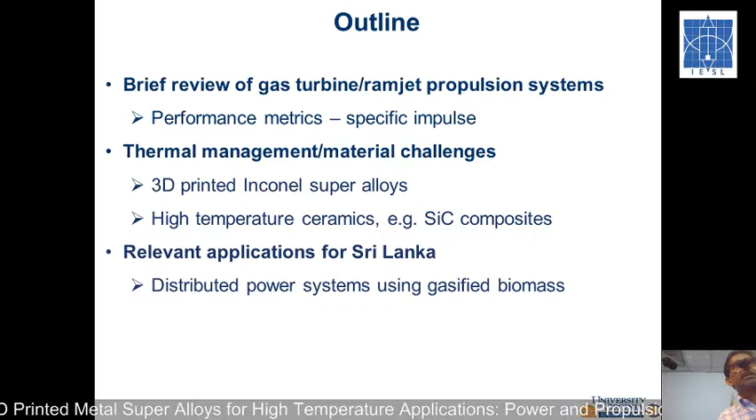I want to break down my presentation into 3 major themes. My research is on gas turbine or jet engine research, as well as another class of engines called Ramjet and Scramjet engines for aero vehicles that can travel at Mach 5 and above. The first third of the presentation, I'll talk about my own research a little bit to get you oriented. In this research, we are using this new manufacturing process called 3D printing.

You may have heard of this - plastic 3D printing is standard now, and now there's metal 3D printing. This is a very high temperature alloy, a nickel chromium alloy, which can withstand very high temperatures and stresses. Many gas turbine engine components are made out of this material, and these can now be printed with 3D machines. I want to introduce you to some of the challenges and how you could use this technology in modern research as well as for application in Sri Lanka.

So the last part is essentially about 12 years back when I was interested in using... Tranak, I didn't see you.

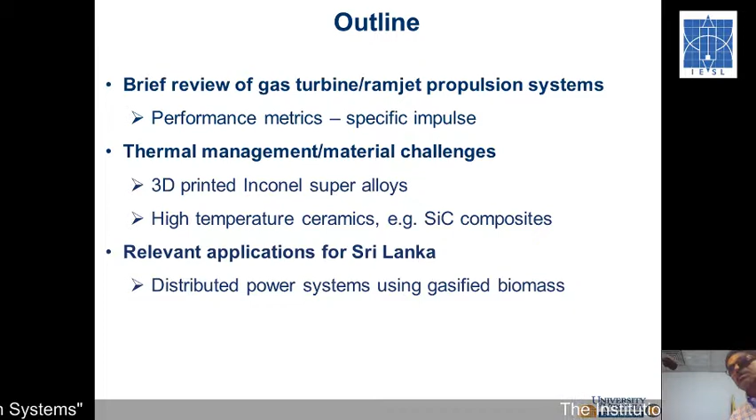About 12 years back I was interested in using gasified biomass for power generation and heating purposes in tea factories as well as the garment industry. But at that time we had a technical problem with one of the gas turbines I was going to use, and my hope is that with 3D printing we can solve those issues. So I'm hoping that with this manufacturing we can apply this and pursue this combined heat and power concept for application in Sri Lanka.

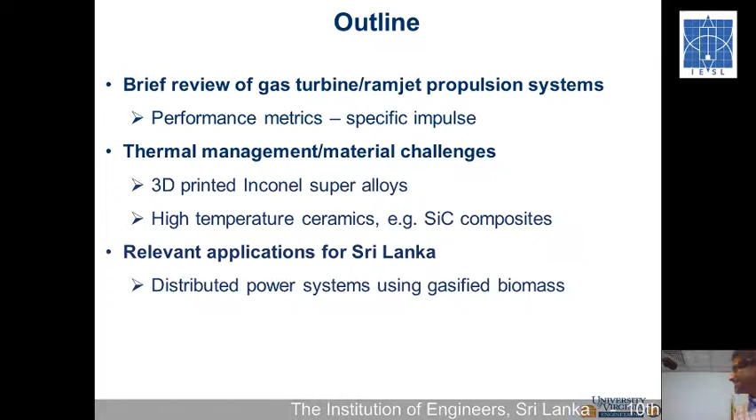So that's the 3 themes I want to share with you today, and if you get it, it's great. That's the take-home message I hope you take. Okay, so my talk.

Propulsion is my research area. Metal superalloys are of interest to many applications, and I'm interested in power applications for Sri Lanka. It's essentially CO2 neutral, using biomass to generate heat and power.

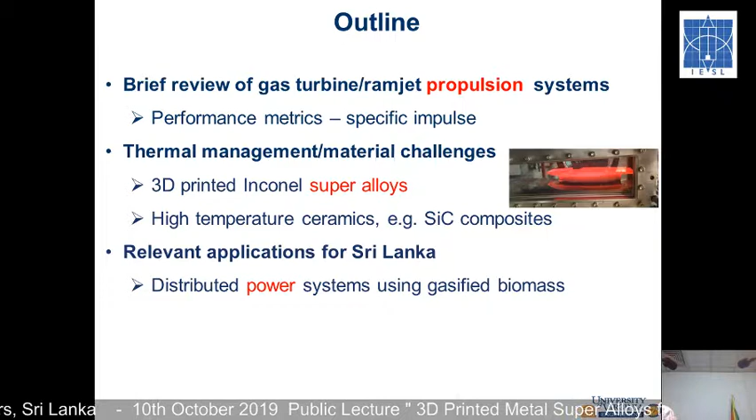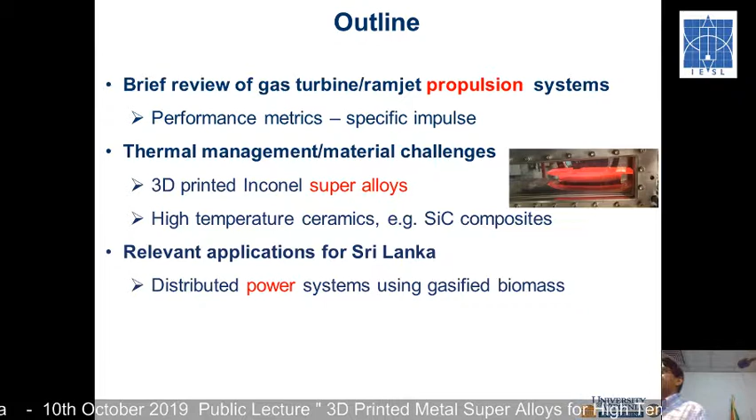So at the back of this, essentially we have cooling water going into the system. There are 5 cooling channels inside this, and that's the only way this can survive at high temperatures. This cannot be manufactured with traditional machining technique - only through 3D printing can you achieve this intricate internal detail.

So let me give a brief background on the difference between gas turbine and Ramjet, Scramjet engines. In Sri Lanka we generally refer to jet engines, which are the same as gas turbine engines, as opposed to propeller-driven engines.

Typical big aircraft fly at Mach 0.85 conditions at flight altitude of about 40,000 feet. That corresponds to about 560 miles per hour, or 900 kilometers per hour. So typical engines fly at that velocity, and this is an illustration of a gas turbine engine.

In the gas turbine engine you have 3 major components. You have a compressor, which pressurizes your intake gas - Rolls-Royce engines operate at about 50 atmospheric pressure, achieved through a series of stator and rotor blades. Then you bring the fuel in and burn it in the combustor, followed by a series of turbine blades.

These first 3 sets of turbine blades get exposed to very high temperature. Only this material, Inconel, invented in the 1940s by an engineer called Frank Whittle - the inventor of the gas turbine engine in the UK. There was an equivalent person in Germany. Inconel was designed to operate the gas turbine engine at high temperature. There are different classes of Inconel material - this is Inconel 718, which has a slightly different composition of nickel, chromium, and iron.

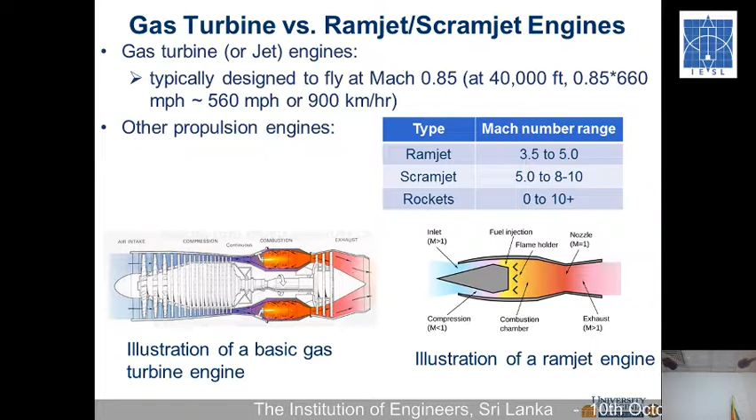Rockets technically can take off from 0 to whatever velocity, but the main difference is that rocket engines, at least current versions, you have to carry your fuel and the oxidizer. So you pay a penalty by needing to carry the oxidizer with you. Whereas these engines are what you call air breathing - you have to carry only the fuel. So your weight of oxidizer is reduced by going to these Ram and Scramjet engines.

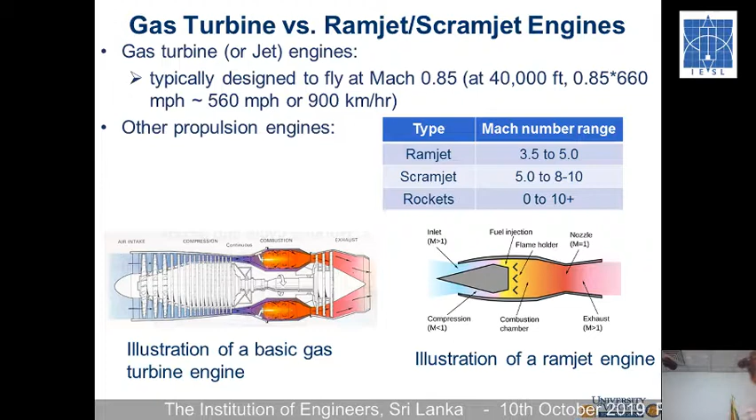So my next chart shows how to compare these two different systems. If you want to look at the performance of the two different systems, this is a way to compare two complete different systems. I'm sure you've taken dynamics - what is impulse? Force times time, and specific impulse is essentially thrust divided by the mass flow rate. The units of specific impulse are seconds.

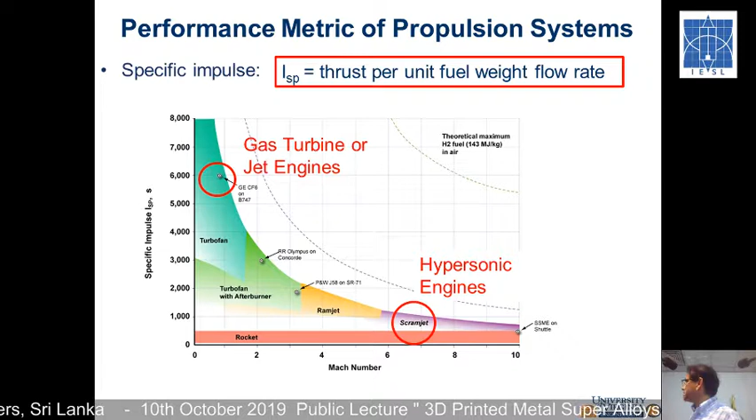If you take a gas turbine engine, it typically has a specific impulse about 6,000. These are GE - I think CF6 engine - the large engines. Rolls-Royce Trent 900 or 1,000, all below Mach 1. So they have a specific impulse roughly about 6,000, very high specific impulse.

And as you go to higher and higher velocity, your specific impulse goes down. So this is for the Concorde - it flew at about Mach 2, two times the speed of sound, and has a specific impulse about 3,000, which implies its efficiency is not very high. That's why eventually they shut it down, because it is expensive to operate.

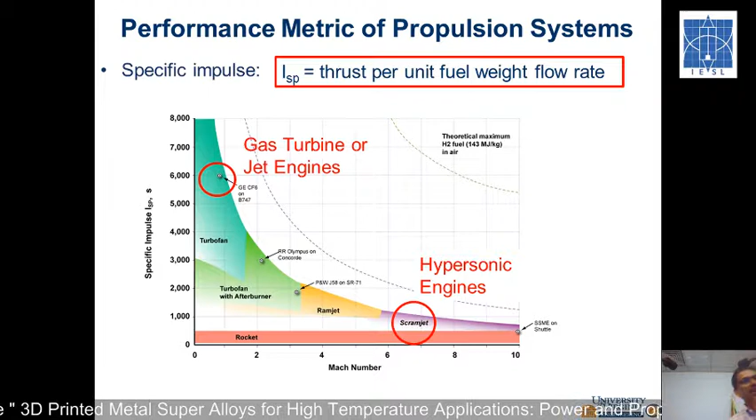Now if you want to go to higher and higher velocity, like Ramjet, which is like Mach 3.5 to 5, your specific impulse goes down. And if you want to go to Mach 5 or 6, in terms of fuel consumption it's a very, very bad design. But for military purposes, they don't care about efficiency - they want a fast flying missile.

But even there, if you compare, rockets have a specific impulse of less than, maybe, 500. So if you want a missile going at say Mach 7, a Scramjet engine is better than a rocket, because in the rocket you have to carry your oxidizer. The Scramjet engine, if you can make one working, you can essentially increase the payload by having a high specific impulse.

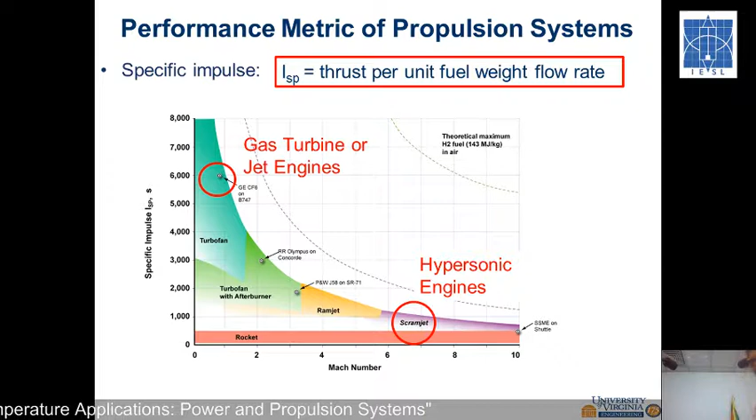This is why China, Russia, and the US are working very hard to get this engine working. One problem with rocket intercontinental missiles is that once you launch it, you cannot really control it. Whereas with a hypersonic engine with wings, you can maneuver it, so you can avoid your enemy.

You cannot shoot it down easily - you can avoid it. That's the biggest advantage of the scramjet hypersonic vehicles.

You can avoid enemy radar and try to attack somebody else. But I'm not interested in military application. I'm interested in civilian application.

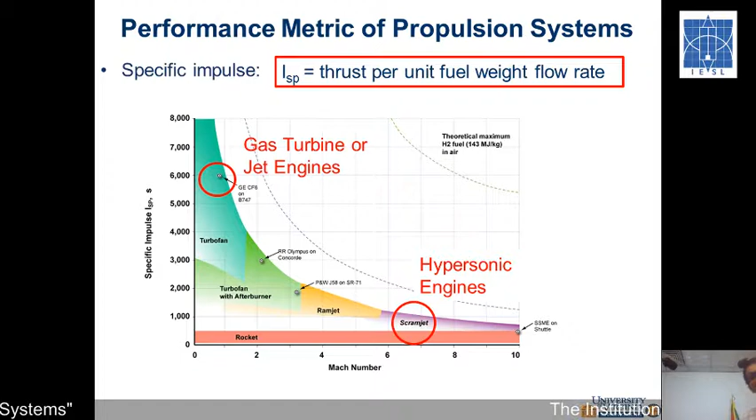Originally, these engines were developed because NASA was interested in getting hypersonic engines working for civilian applications. NASA is still interested, but currently the research is being dominated by the military because that's where the money is.

Why hypersonic would be great: think of some long flights. I flew from San Francisco to Singapore, a 16-hour flight. Imagine if you could fly at Mach 6 or Mach 7, you could fly in about 3 hours from San Francisco to Singapore. That's a personal interest of mine. It won't happen during my lifetime, but maybe during yours, one day it might work. There are a lot of challenges, but there's military application, there's civilian application, and hopefully one day we can overcome the challenges and have fast airlines.

Although fuel efficiency is very poor, since your flight time is lower, the total fuel consumption is less. This is why for rockets, you want maximum chemical energy to get out of the gravitational field. So there are advantages of going faster, although your fuel efficiency is very poor.

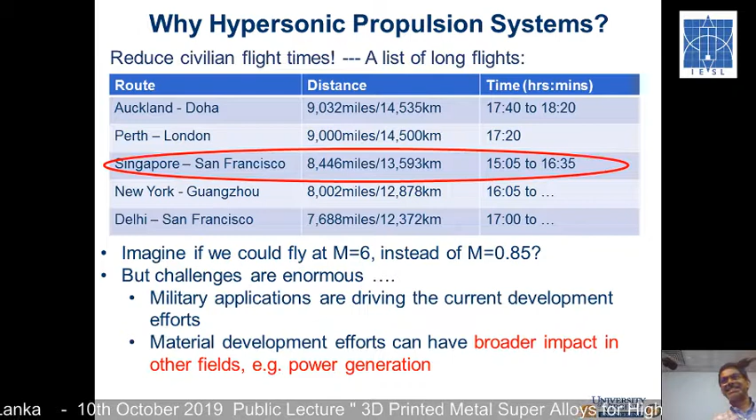Both these applications, hypersonics and gas turbines, require increasing efficiency, which requires better materials. We are living in a material world, really. If you have better materials with better coatings, we can run at high efficiency, high performance.

Material development can have broader impact, not only in propulsion. I want to talk about gasified biomass applications for the garment industry and tea industry, which can benefit from this technology.

That's the take-home message: don't worry about our research in the US, but there are applications in Sri Lanka with new materials and manufacturing methods. You can have broad impact to humanity. That's the take-home message.

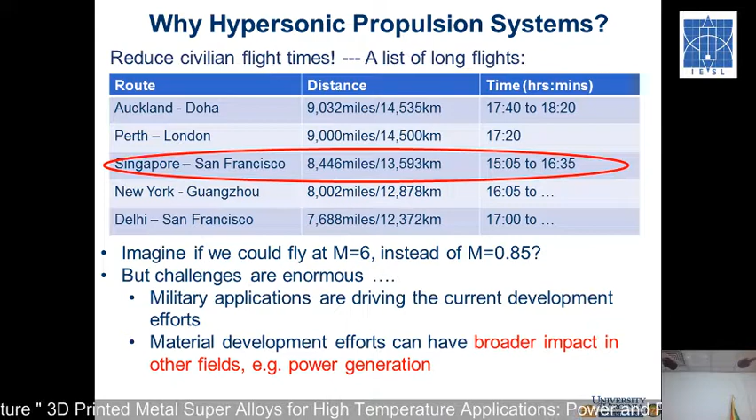A few words about hypersonic propulsion. There are many challenges, but at the University of Virginia, we are focusing on thermal management, essentially cooling technology and fueling technology for these hypersonic engines.

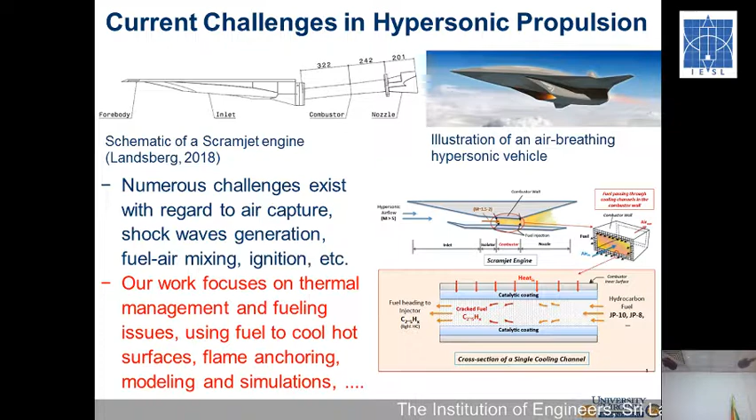The facility we have at the University of Virginia can mimic a plane flying at Mach 5. At Mach 5, if you bring the air molecules to stationary conditions, your temperature goes to what's called the stagnation temperature, which is about 1200 Kelvin. So to test a plane going at Mach 5 on the ground, one way is to heat the air up to 1200 Kelvin. We have a giant heater about 30 feet deep going into the ground, and we can heat air up to 1200 Kelvin, and then we have this test section.

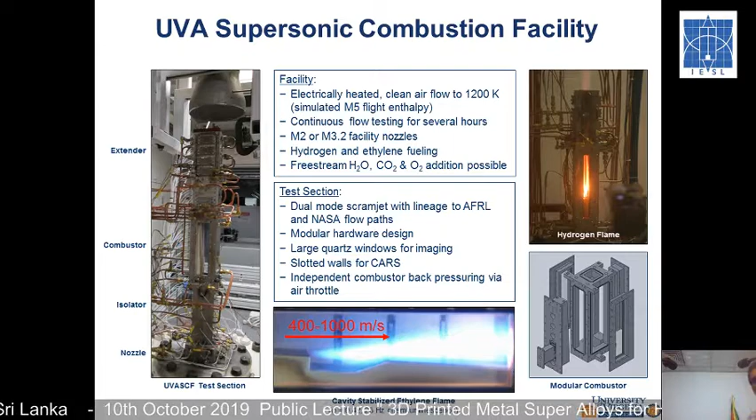So looking at somewhere like that, air is coming from the left side, and fuel is fed upstream, and we can anchor this flame over this and generate thrust behind this.

The challenge here is to make this part cool, and also the velocity of this flow varies from 400 to 1000 meters per second. So you have less than a millisecond to burn this fuel-air mixture. Typically, if you don't have the right conditions, it gets blown away and you don't have thrust. So the question is, how do you keep it anchored there and burn steadily?

We can run this facility typically 5 hours continuously. Each time, this part gets exposed to 5-6 hours of high temperature experimental conditions, and it survives based on the cooling techniques we have. We are doing a lot of testing in this lab, especially at Mach 5 conditions.

We work with Air Force Research Lab and NASA on this, and currently with the Navy, US Navy. The other thing is that with 3D printing, we can also change the geometry very quickly and easily.

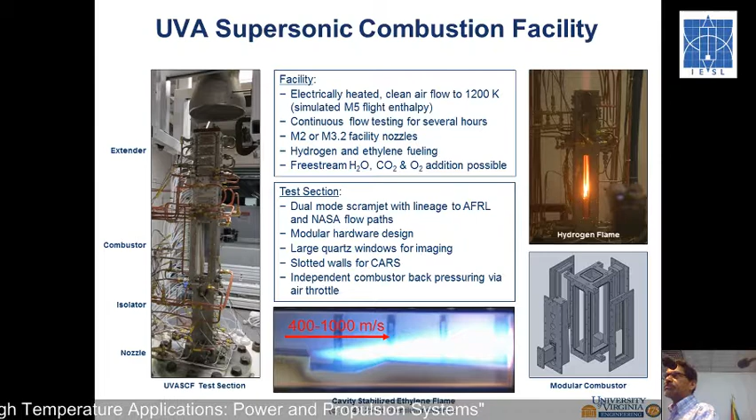So this part cost me about $5,000. In the US scheme, $5,000 is not bad, and typically this experiment we get about $400,000 funding for a year, so $5,000 is not that bad.

With 3D printing, we can change the geometry and test different conditions to understand the flow dynamics in here. And then we also have a simulation group that does computational simulation of the flow field.

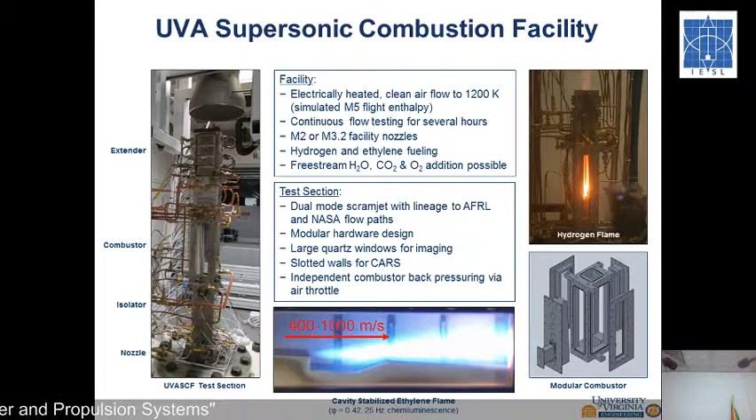We also have a diagnostic group that does a lot of advanced laser-based diagnostics to quantify velocity, measure temperature, and study molecules with non-intrusive laser-based techniques. So those research efforts are ongoing in the lab.

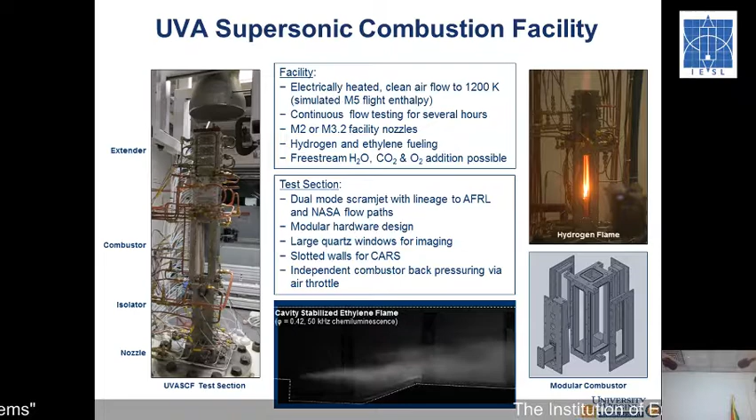This is a high-speed image looking at the system. You can see the chemical emissions from the flame at 50 kilohertz frequency, showing the flow dynamics taking place in this system. The flame is anchored in this cavity region. Let me not dwell too much on this.

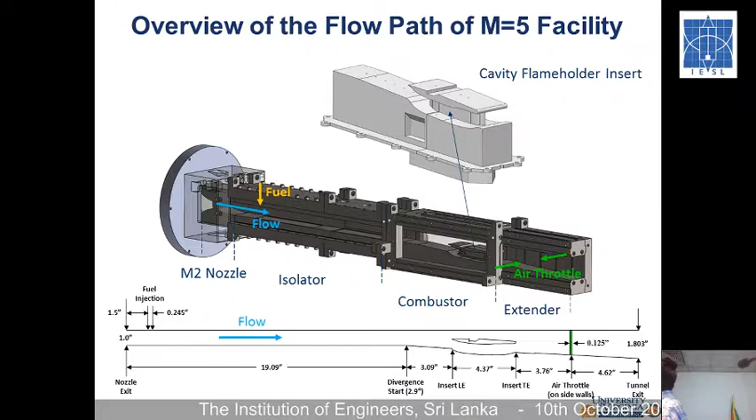We do all the testing in this part here. This is a CAD drawing of this part, and it's built in 3 components. The cooling is a critical part of this part, and I'll talk about that.

The thermal management is a challenge. As I mentioned, the 3D printing essentially saved us. If you had to manufacture with normal techniques, we'd have to make this in 2 parts and then fuse it together, and it gets complicated. With 3D printing we can do very intricate designs.

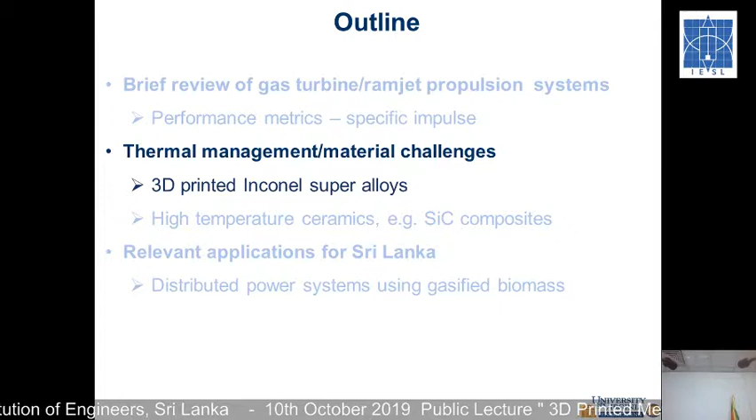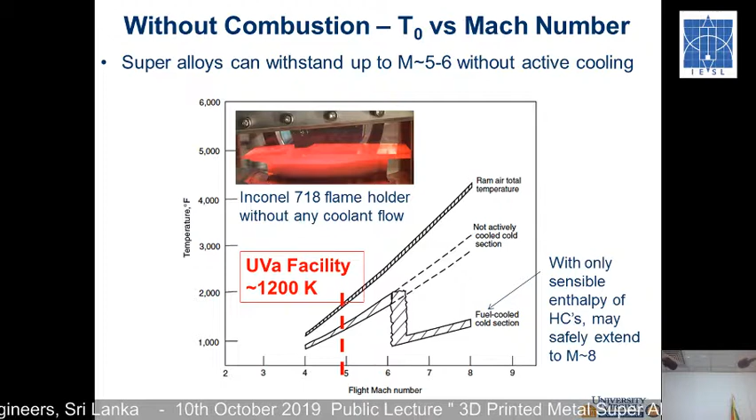Let me talk about that, skipping some things here. This is a photo of this part without cooling, and here is a case where our first version of this failed.

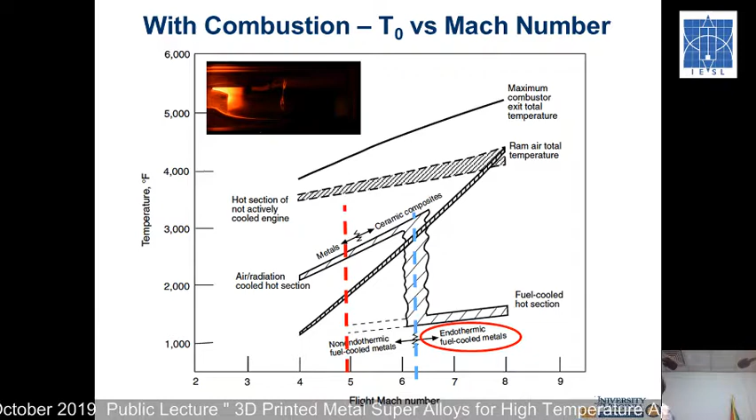Our first version, we didn't have enough cooling, and when you inject the fuel and air into the system and combustion started, it completely blew up. So cooling is very critical, and also the 3D printing technique is very critical. This is the image of the failed part. We failed twice before we got to the final version.

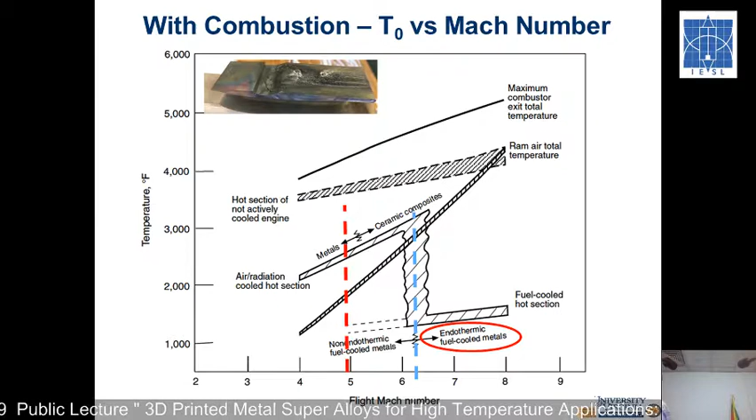Let me talk about the events that took us to a successful design. First, as I mentioned, plastic 3D printing is very standard. In fact, first we printed a piece like this in plastic and tested it out without combustion.

The metal 3D printing, as I said, has really grown exponentially, and these machines are now mostly German. There are a couple of companies called EOS and Concepts, and the smallest one, about a foot by foot footprint, is about $250,000.

It's not too bad. Essentially it's a box, and the way you do this is you have a CAD drawing, and depending on the material you want—in this case, Inconel—we take roughly 40 micron powder, and you layer the powder, and the laser head will go and selectively melt it where you want it fused. And people are also experimenting with the electron beam method as well.

Now the resolution depends on the laser, what you call the focus beam. I was told the smallest feature you can currently print is about 100 to 200 microns. So I have printed a part with a 150 micron orifice using this Inconel material.

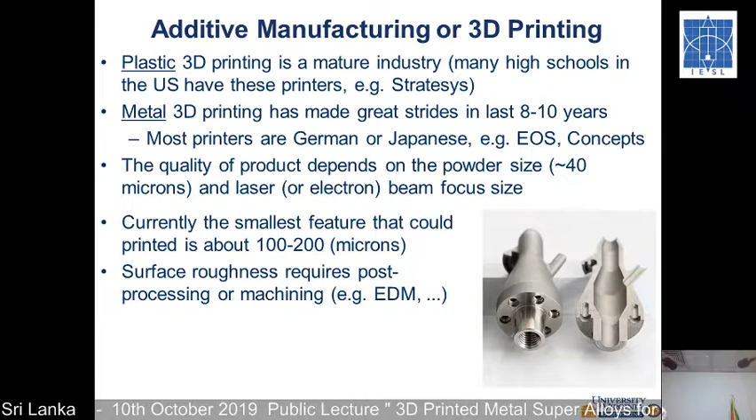These companies have a lot of experience, they can print this. So this is another example of a 3D printed part. I got it from the internet, and you can see these intricate channels. Of course this could be machined and fused together, but with 3D printing you can print all these little details in one shot. A part like this can be printed straight up.

The other thing is that when you're 3D printing in these machines, with a big box, you don't print only one part. They pack as many parts as possible, so you do 10-15 jobs at one time. That's why this cost me $5,000 - if I had to print one single part at a time, it may cost a lot more. The powder itself costs about $10,000 to fill an entire box, but if they print 15-20 parts, your cost goes down.

So this technology is there, and also notice that the surface is rough - the roughness is essentially 40 microns. You can, though, if you need to - in fact we have another part I printed which we machined using EDM, electrical discharge machining, and with that you can get smooth surfaces. So you can post-process these things and get smooth surfaces as needed.

So the type of architecture that you can design and build with these real metals is humongous - applications are enormous. I think Sri Lanka should definitely take advantage of this. So far I have not found anybody using these printers here. I think it's something we need to encourage industry in Sri Lanka to adopt.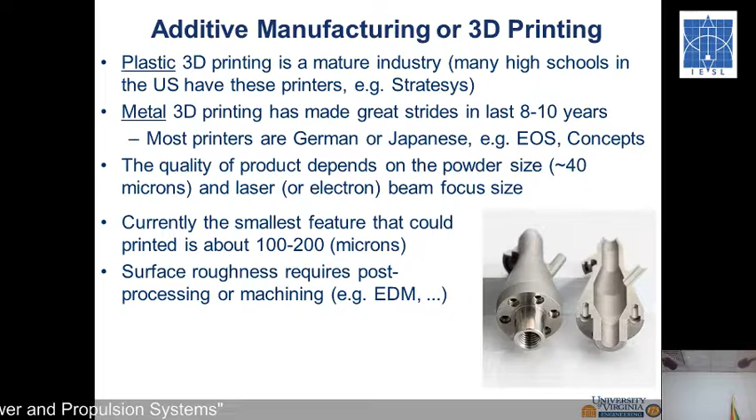Okay, so this is the internal drawing of this part. In fact we printed it in 3 modular pieces. This is the base, the support material, which is very simple. They have intensive cooling, but this is the critical part. We designed this so we can change this geometry as needed. In this part we have 5 cooling channels coming from the bottom up - one channel here, another here, and the most critical part is here, then the downstream here. Inside this there are 5 cooling channels, and this is a very thin wall.

A 1.25 millimeter thick shell essentially. By doing that, we are able to take the powder out, and we get all the flow rate that we needed.

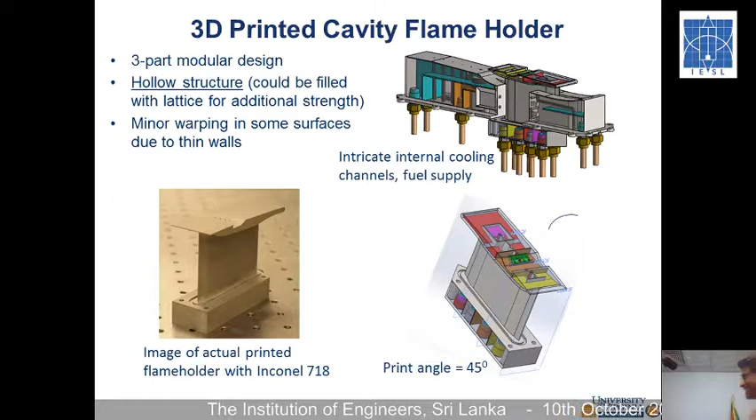All right, so that's all I have to say about the technology. Here's an image, and I think there's a video cartoon here.

This is the actual running of experiments. We are fueling, in this case, ethylene as a fuel, and we can stabilize the flow at different fueling amounts. This is equivalence ratio about 0.43 - you know about chemistry, equivalence ratio, right? Lean conditions, this is a lean condition. You can see less intensity.

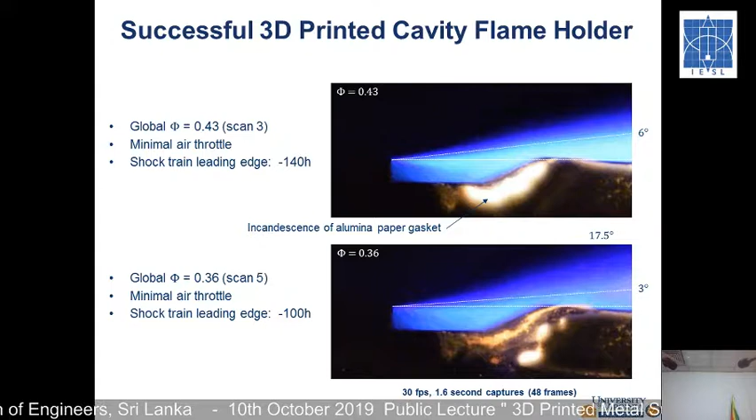This is due to the gasket we have between the glass and the material - our gasket is glowing in here. Okay, so this works, we can run it. This has seen about 100 hours of our test run, and you don't see any burn marks on this, because of intense cooling in this system.

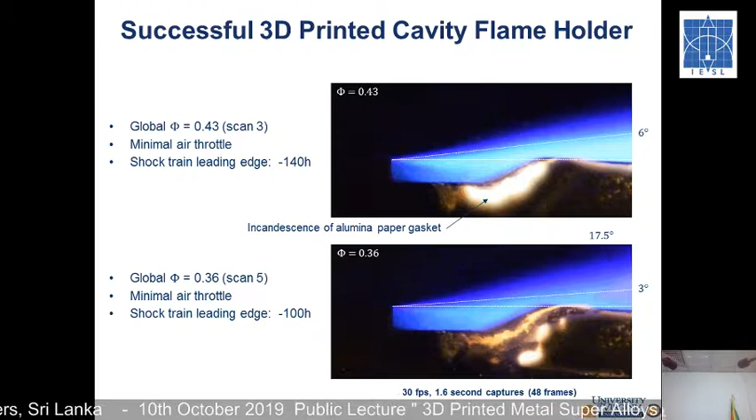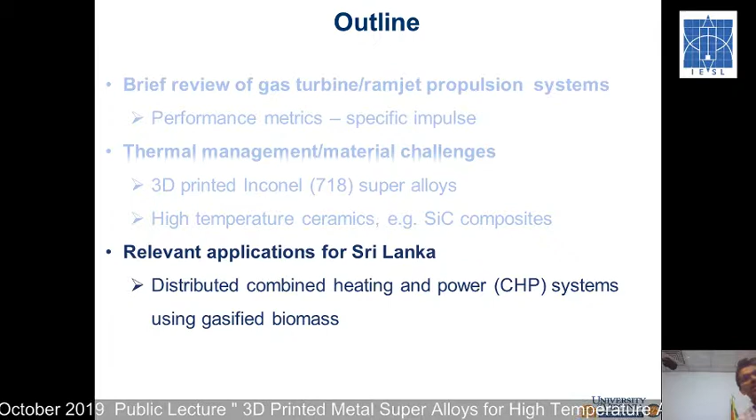Let me take this and try to combine this manufacturing and gas turbine application in Sri Lanka, which you may be aware of - I'm personally interested in this. About 12 years back I was passionate about this, and I had technical issues, then I got busy with other research and didn't have time to go back into this. I think time is probably right now. If anybody's interested, we can talk about this later.

So my idea is essentially that in Sri Lanka there's plenty of biomass. I've been to a friend's tea factory, and they use firewood just for heating - a very primitive way of drying tea leaves. So the idea was, can you gasify this biomass and use it cleanly to generate power? This is combined heating and power, CHP. Some of you may have heard about this, right? So it's not a new concept.

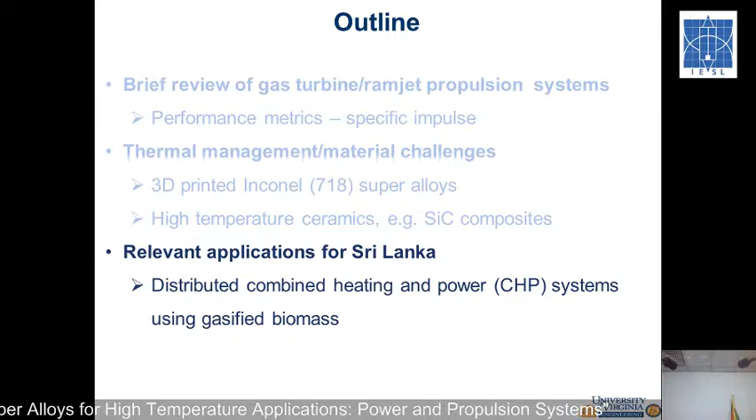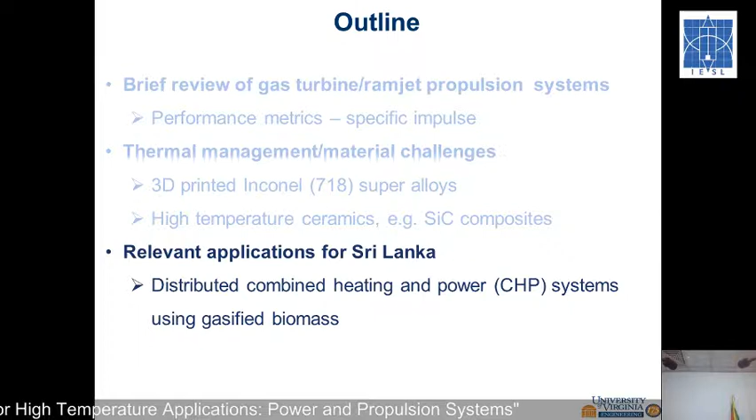In fact, the University of Virginia had a combined heating and power system in 1917, I think. They discontinued it when they moved from direct electricity to AC electricity - so around the 1910s they discontinued that. So it's not a new concept.

So this is a tea factory down south towards Avissawella side, and around this factory it's full of firewood, right? The way they use it is essentially they have a wood-fired furnace, and there's a heat exchanger - the air goes over tea leaves and you dry air at about 500 degrees Kelvin. The analogy to me is that if you have, say, a reservoir on a mountain...

...a water reservoir, and you have paddy fields in the valley, what do you do? You can always open a gate and send the water to the paddy fields to irrigate your farms, right? So you're using high water head to irrigate your paddy fields in the valley. To me, that's a waste of water head - potential energy. Similarly, firewood has essentially chemical energy, potential energy, just as molecules have potential energy.

When you burn the firewood, you create a temperature of about 2000 degrees Kelvin - typically a flame has a temperature of 2000 Kelvin. But you're taking that high temperature gas and bringing the temperature down to 500 Kelvin just to dry tea leaves. So you're wasting all that potential energy - chemical potential energy.

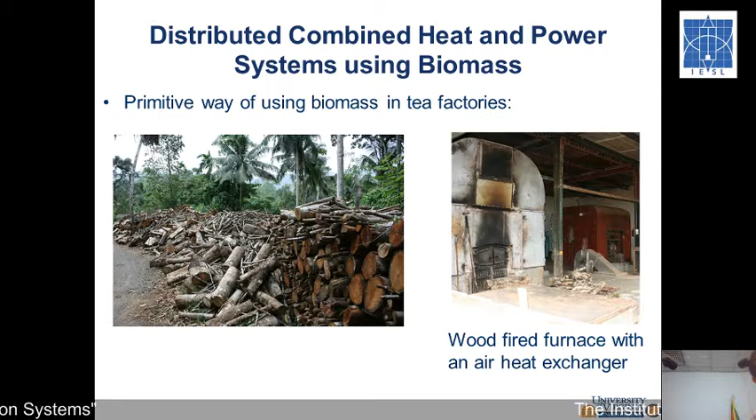That's why I call this a better system. The approach is a bit cleaner in a sense. When you gasify biomass, you have a lot of junk, so you can separate that out. Whereas here, it's very sooty, a very unhealthy way of burning it.

So this is working, and we're running this all the time. I was pretty excited, so I thought I should share this with you guys. They take this from here, go to the next building, and this is a supply of syn gas fed into the boiler.

So my challenge to you is to take this biomass and connect it to a gas turbine and generate power, and you still have enough leftover heat that you can provide hot water and heating for a building or a garment industry as well.

So they have a sort of promo of the system. They do a CO2 calculation, don't ask me too many questions. They claim that they save about 136,000 rupees a month by going from diesel to biomass, and they claim the net CO2 saving is about 5,760 kilograms. So that's how they are advertising.

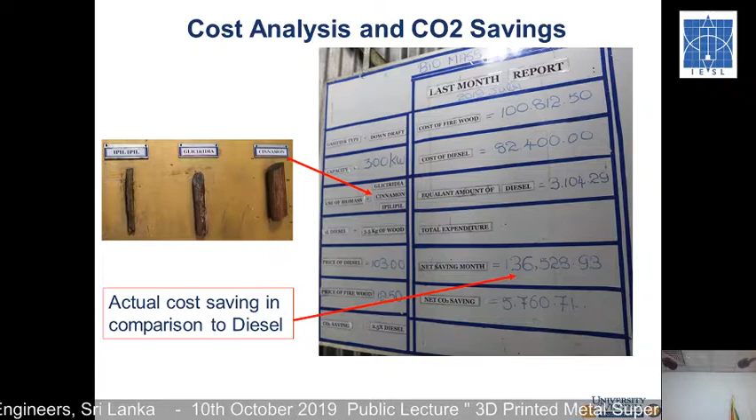They use what's called fast-growing ipil ipil, and this other one—forgot the name, I think cinnamon—as a biomass source. Those are the things in bags here. So they're not cutting fresh wood to fire this; essentially they're using these fast-growing trees to generate the biomass needed.

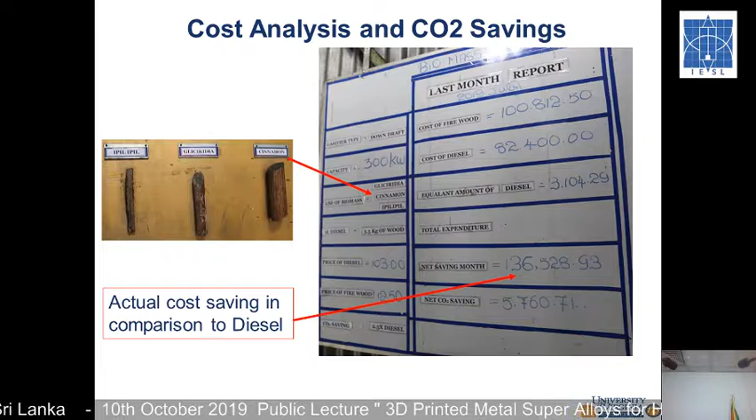So the question is, can you do better than this? Doing better is the idea I was hoping to pursue before. I have two micro turbines, small scale turbines that can generate 30 kilowatts each. You can buy systems at 30 kilowatts, 65 kilowatts, or 200 kilowatts, but you can stack them in parallel and develop up to 10 megawatts if you want to. Each one generates about 30 to 200 kilowatts, but the problem is that individually, the electrical power generation is only about 29% efficient.

So they are very inefficient gas turbines, only good if you want excess heat, like tea estates or garment industry. If you just want to use the fuel to get power, this is a very bad idea. The reason is these turbines operate at a very low pressure ratio, about 5. Remember I talked about civil aviation engines—they operate at a pressure ratio of about 50, which is how they achieve very high thermal efficiency. By operating at lower pressure ratio, these turbines aren't ideal for pure power generation, but if you need a heat source, like tea estates or garment industry, it's a perfect solution.

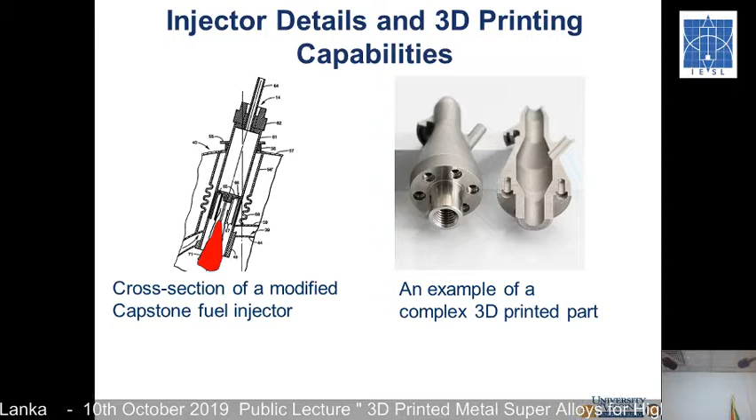It could not handle high hydrogen content. The reason being, this injector - this is a cross section I got much later by going to the patents. I found the patent of the company and the design. Essentially, you take compressed air, and your fuel comes from here, with holes on the side, designed for an ideal fuel air mixture, and the flame sits lifted from this tube. If you send a lot of hydrogen, the combustion region gets sucked into the injector, and no matter the material, without cooling it's going to melt down.

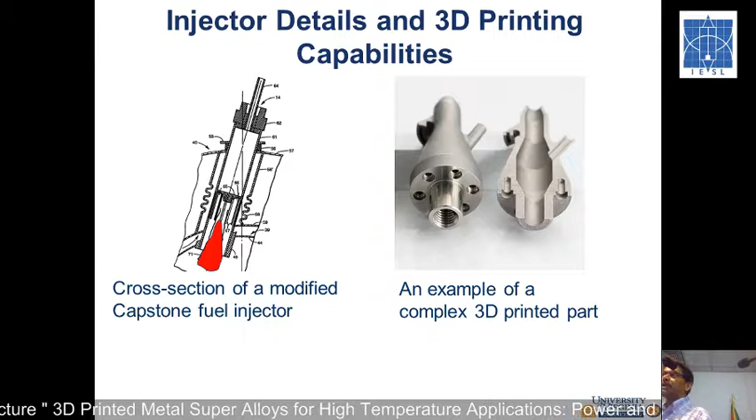So what it requires is that if the fuel composition changes, you need to change the geometry of this injector, adjusting its velocity or cross section diameter to account for the high hydrogen content fast burning fuel. I can easily pull out this injector from the turbine, and with 3D printing we can redesign this to run any fuel air mixture.

So I brought this in here. With 3D printing you can design and build this - it's very simple. After doing this, building an injector like this is pretty trivial in my opinion, with Inconel material, which is probably better than the materials in here. I think this is my last slide.

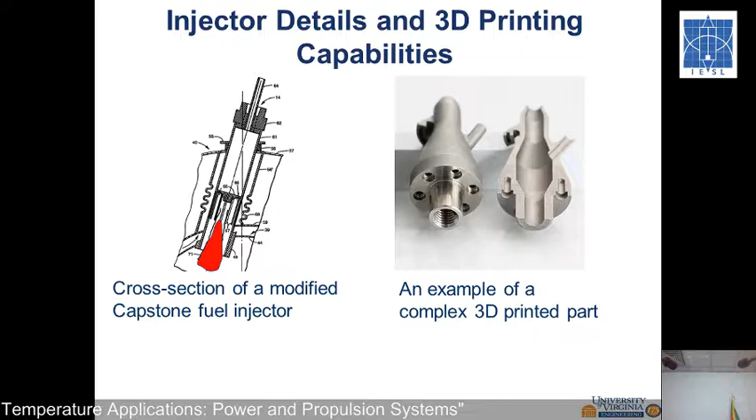The take-home message is that with novel technology - I call this game-changing - once this technology is there, we cannot go backwards. It's like GPS. In the old days we used to travel with maps, and who uses maps anymore? GPS is a game-changing technology. 3D printing, in my opinion, in the next 10 years is going to be a game-changing technology. You can reverse engineer anything you want.

You guys especially are good at CAD drawings. Once you draw it, you can easily ship it to these machines and print it out. You got to pay attention to the details of orientation and all that, but it can be done.

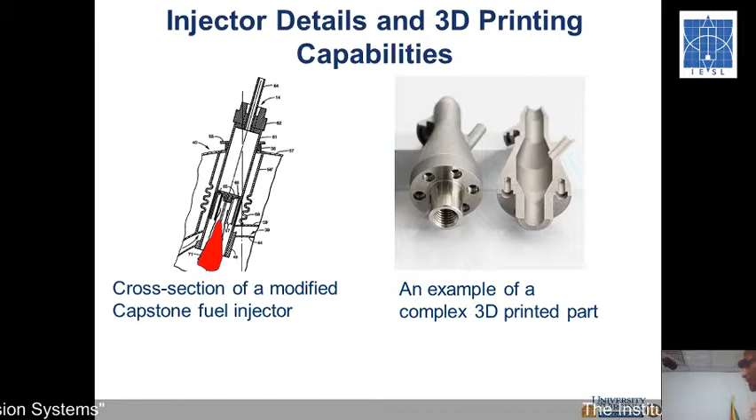I'm hoping to retire in about 3-4 years. My passion is to go back to this and make this work. So I'm interested in finding partners here - anybody with clever ideas interested to pursue this, especially with application in Sri Lanka.

Summary: additive manufacturing with super alloys. You can make this with titanium, different materials. Copper is considered hard, but in fact copper can be done as well now. People are exploring this. Inconel - there are different classes. This is 718, there's Inconel 625. Different classes of Inconel material can be used.

Application in Sri Lanka - I think clearly the tea industry, garment industry, where heavy heating is needed, can definitely benefit from this technology. And as I mentioned, 3D printer prices are probably coming down. I'm sure the Chinese are getting into this - the Japanese have their own machines, and Chinese are starting to build these machines. I'm sure the price will come down, and the price of the powder is the most expensive eventually. The laser heads should not be that expensive.

So with implementation of combined heat and power, with biomass available in Sri Lanka, I think certain industries can benefit.

Now in terms of emissions, I'm a combustion guy, and I think for land transportation we should all go electric. My cars are all hybrid and plug-in hybrids, but civil aviation - planes carrying heavy batteries - is not a good choice, especially large planes. So there are certain applications where hydrocarbons have benefit. Sri Lanka should really go after wind energy and solar for sure, because we have tremendous wind energy sources here, and for transportation we should definitely go towards hybrid, electric plug-in electric type vehicles.

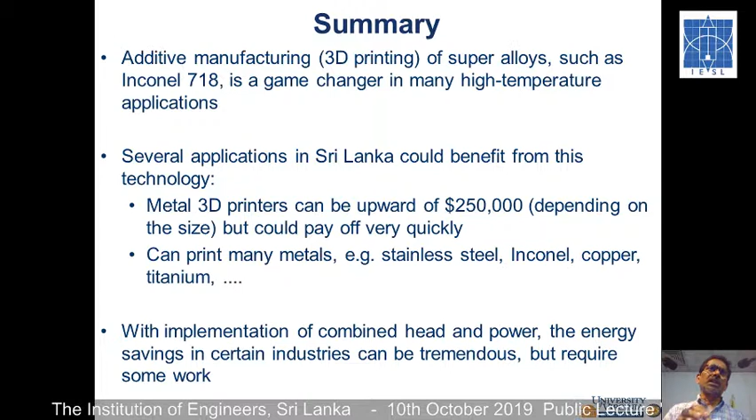So the issue is the structural integrity, the porosity. This is why they use lasers—they are testing electron beam melting instead of laser melting, so we can focus it better and try to make sure no pore structures are there. So for us, this part doesn't see...

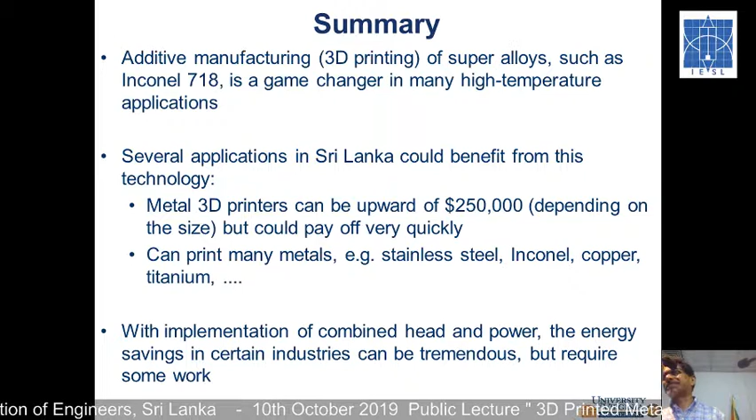Maybe you can do experiments with that, and later take it further for large scale manufacturing. This is excellent for prototypes, because otherwise you'd need to take a unit like this in traditional manufacturing, which could cost more and take more time compared to 3D printing. And if it fails, you'd have to make more.

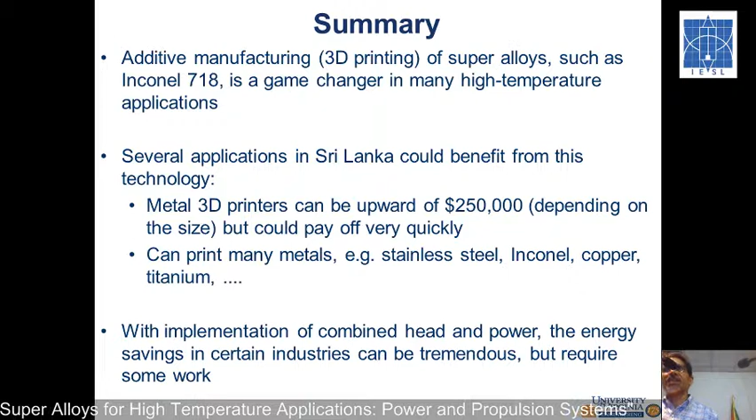So once they are comfortable with the manufacturing technology, they could have a hundred of these machines. Each printer can print several parts, typically taking a day or two to go through the entire layer depending on size. So scaling up is very easy. The technology is expanding exponentially. I think within the next 10 years it will come to maturity and become standard, like old-fashioned lathe machining techniques or CNC machines. So the potential is enormous.

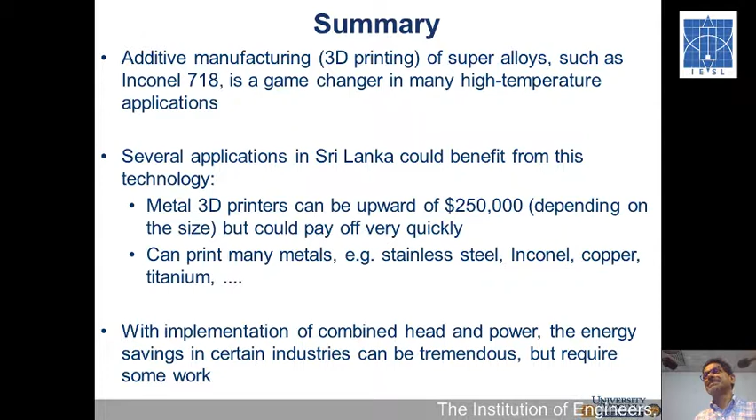Gasification was fine, but not easy. We managed to - the company managed to - I was also part of it - do the prototyping, and it was okay. Then it was replicated at different phases.

But the gasifier, as you said, the gasifier technology could not sustain. It was almost downdraft, not a reduction type. And probably the gas cleaning to suit the gas engine was not correct, so we had a lot of practical difficulties.

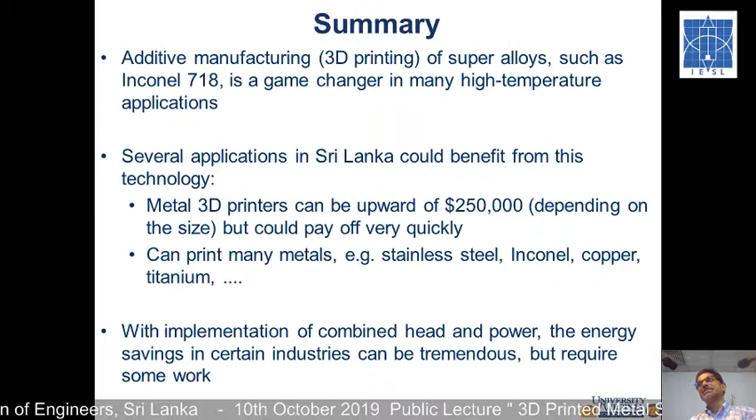Ultimately, over 4-5 years, they managed to sell a few gasifiers, a large one to one of the ceramic industries for thermal investigation for their furnaces. But ultimately it died off. The issue was probably we could not get the proper gasifier to suit our fuel sizes and requirements.

So currently there's a gasifier being worked on at Moratuwa, a mechanical gasifier. They also did some testing, getting the gas engine successful. Taking it to the next level, we can plan subsequently, maybe through email. Definitely - it's good to see feedback between industries for us again.

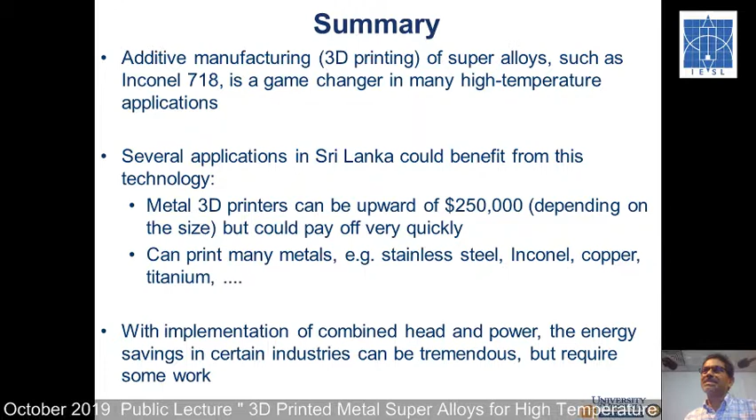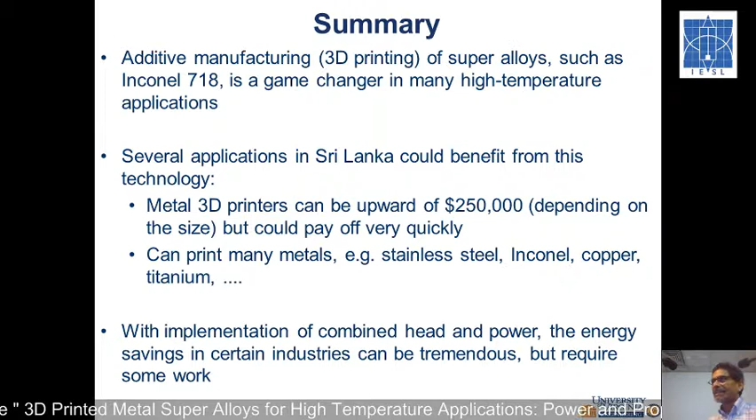There would have been a long period because of bad experience with the gasifier, not with the technology itself. So your dream of revisiting and revitalizing this would not be that difficult, I guess. I don't underestimate it - it's not easy.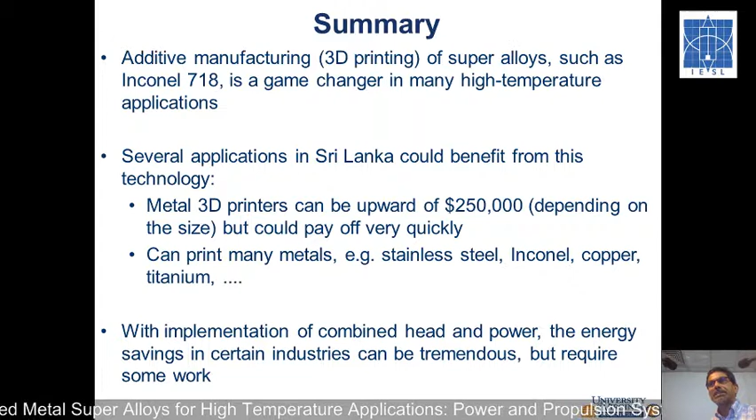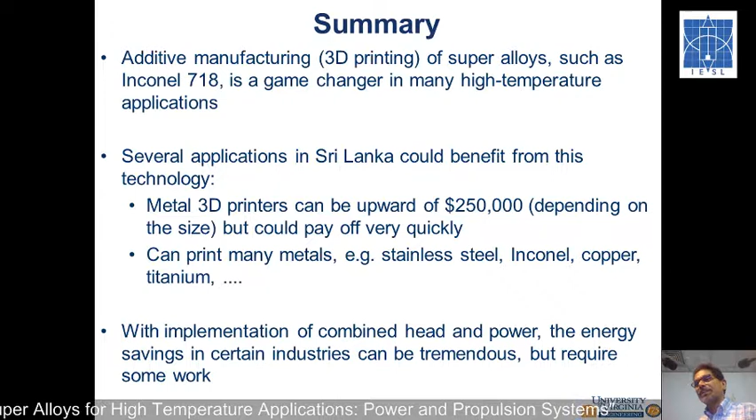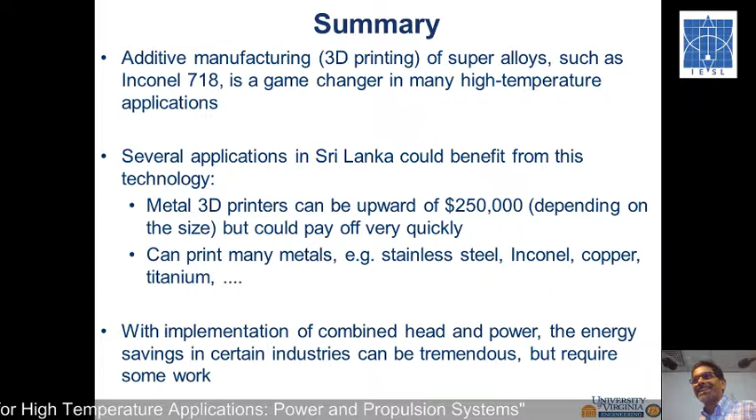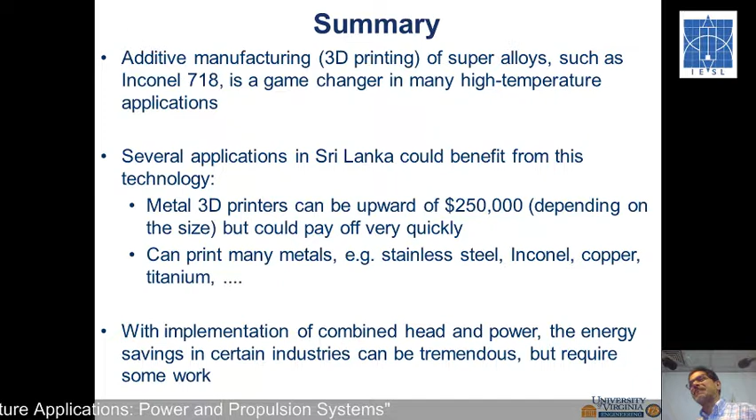Have you been to IISc Bangalore? Professor Mukunda is famous, so I know him very well. He's very passionate about this, and his lab has gasifiers, but they're running reciprocating engines. It's not a very clean operation, so I think gas turbine is a better device, because reciprocating engines have to be fueled and cyclically adjusted, whereas a gas turbine engine can be more forgiving in terms of fuel injection because it's continuous flow and can take some fluctuations. So in my opinion, gas turbine engine is a better choice for this gasified biomass.

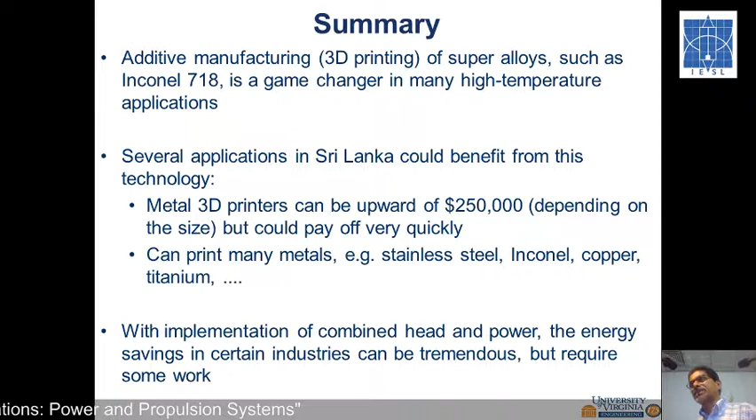Correct, and so the gasifier itself is not very easy, but this design - there's a guy here in Colombo, I can't remember his name now, he's left, gone to Canada - he had a similar injector. Yeah, it was in the company.

Cyrus is in communication, he had a very similar size one. Yes, they bought it from India, Ankur, right. So this one, this is a tea factory in Nuwaraeliya.

They bought this for, the whole thing cost about 7.5 million rupees, only for 10 years. I got the engineer's name, seems to be running very clean, and it was running while I was there. I was very impressed, it's much better than what I saw at IISc in India, which is a much dirtier lab. This is super clean, I was really taken by this.

If the way these guys have mastered it, and if you can get this gas, I can easily put my microturbine in there and run this. Of course, I had to change the injector. So this is a great opportunity to work with these guys and use their knowledge, and they're interested in getting the power because they'll get free power out of it. So I think we should definitely go after this.

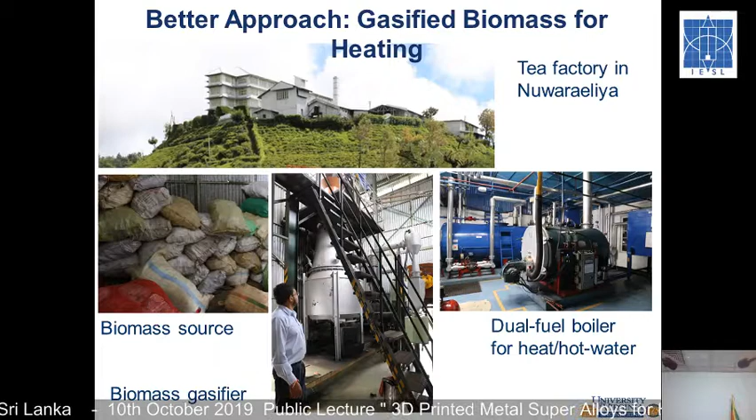These gas turbines are designed to run the micro turbines I have. This one can run on pure methane or natural gas, which is not pure methane, like 93-97% methane, and also can run on digester gas. If you take cow dung and process it, you can generate digester gas, which has typically about 55% natural gas. This system can run on that; the burning velocity can still handle it.

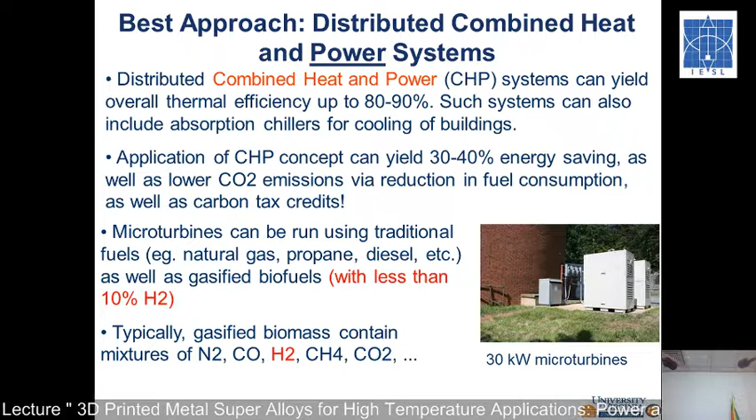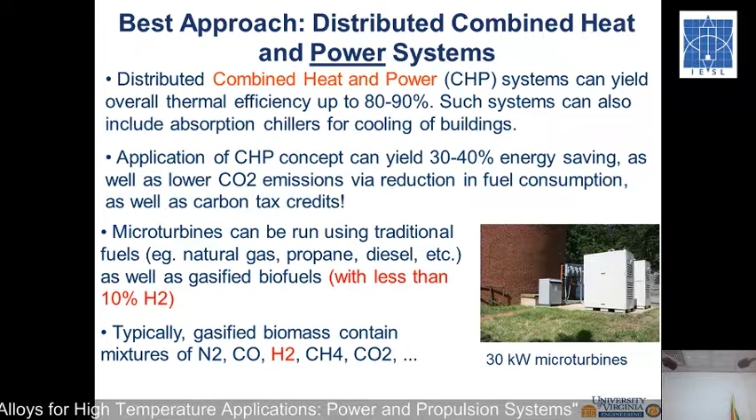Another one, if you have landfills, landfill generates natural gas called sour gas. This is designed to run on sour gas too. So it can handle many fuels, but not high hydrogen content, because its flame propagation is much faster. It gets sucked into the injector and can burn it down. So this company didn't think about using gasified biomass. They designed for the other fuels, not for gasified biomass, which requires major injector modification.

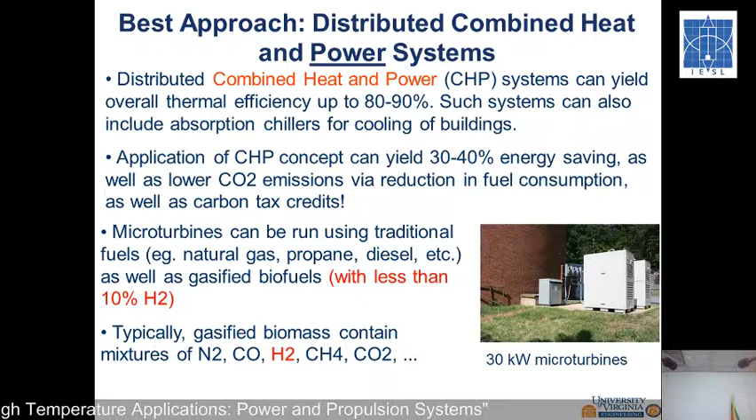So did you measure the composition of the gas coming out? Not really, sir, but we were able to calculate the calorific value, but were not able to go for a proximate analysis.

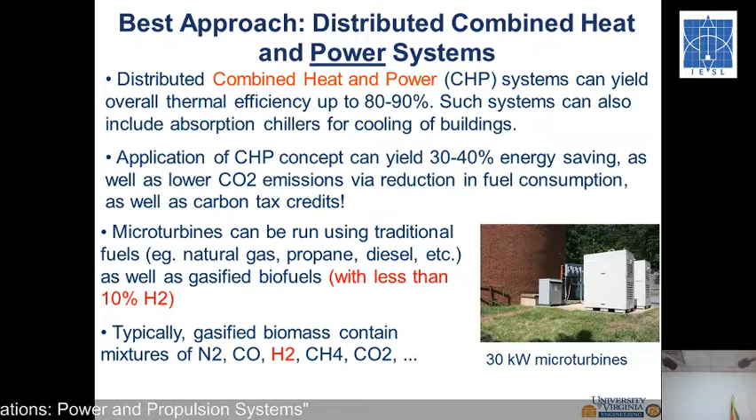So this system requires a certain heating value. There's a range, but this is a nominal value. It requires that much heating to go into the system so that it can run and generate the energy to run the system. Each machine has its own specs.

So this turbine which can handle producer gas, syngas, is still not at the commercial level. I don't think so. So the one issue is that this company is in California near Irvine, and they have an arrangement with the University of California, Irvine.

They donated one of the turbines to me free of charge. The other one I got from the state of Virginia, they gave it to me. So I got both free. But they were willing to work with me, yet they have a non-disclosure agreement with UC Irvine. They were not willing to share with me the injector design, complicated issues. So I got frustrated and I just gave up 10 years back, and I got busy with other stuff anyway.

Technically, I could pull out the injector and redesign it, and not have to deal with the company. There are other companies who make this. Germany's DLR Stuttgart is investing heavily on these micro turbines; they think this is going to be a big money maker. There are entire units working on developing micro turbines for new applications. Others are coming up with it too, and Ingersoll Rand is another company that makes micro turbines as well. So it's not only one supplier, there are others making these things.

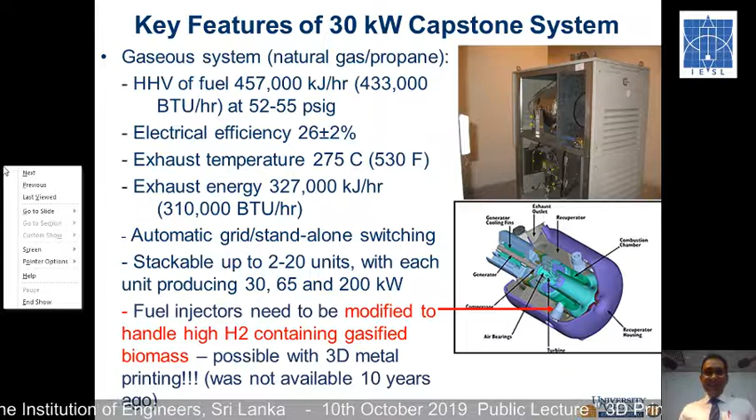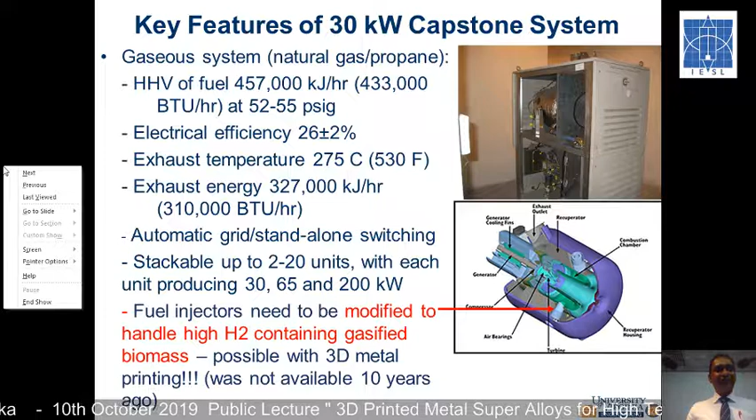I think in future I'm thinking about a 5 kilowatt micro turbine in my backyard running from household waste and other things. It's very interesting. And the big thing, the 80 to 90% overall thermal efficiency of this micro turbine is a very interesting factor, when compared to reciprocating engines, where it's normally less than 30% sometimes, as I know.